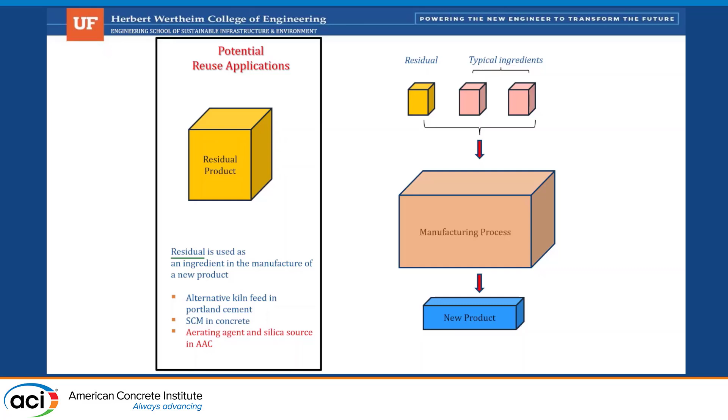So real briefly, we've talked a lot about this, but when we think of residuals for use as a reuse application, we can have recycling products and we can also have reused products. And when we think about the potential for MSWI, it can be used as an aggregate, it can be used as a number of different components for concrete, and in this case, a little bit more of a specialized ingredient, and so I'm going to talk about that today.

For those who are not familiar, the waste to energy process is just basically burning garbage, okay? And so we have our urban or suburban household trash that gets put into a waste bunker that then winds up going into a boiler, into a furnace. Furnace powers the boiler, you get electricity out of that. And then all the stuff that we don't want are the residuals.

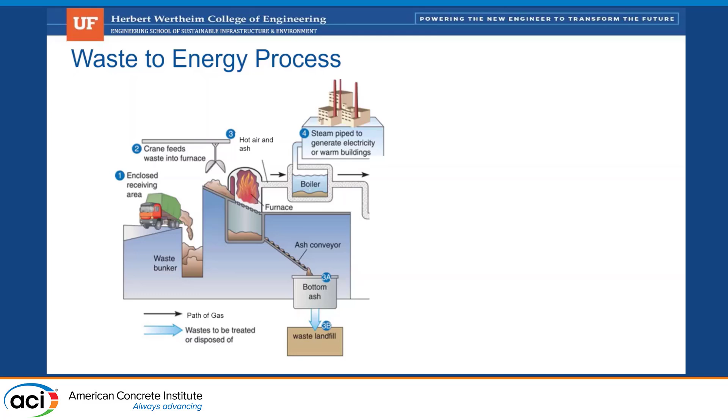The bottom ash is 80% of the total residual, so about 80% of all WTE residual is the bottom ash. There's also some waters that come with that. Those usually wind up right in the landfill. And then there's some fly ash as well. I'm not going to discuss most of that other than bottom ash today, okay?

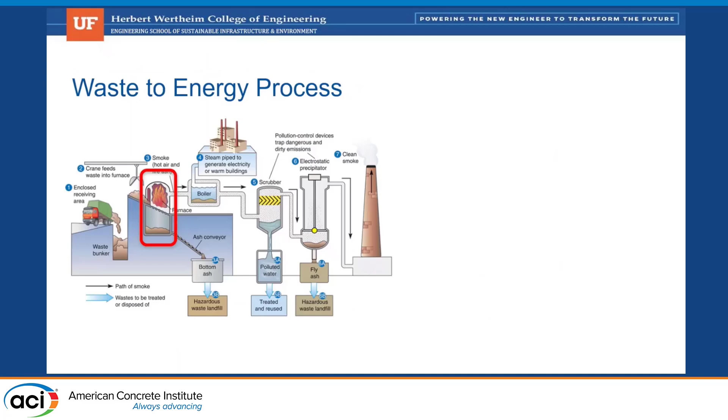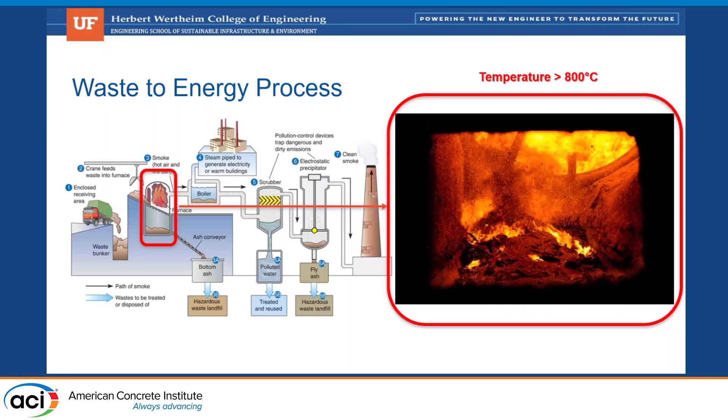And so focusing on the furnace for a minute, let's see what we really have when we look at that, right? So in there, we basically have a controlled, but uncontrolled at some levels, roughly 800 C burn. It's not as controlled as a cement kiln, and it's not as hot as a cement kiln either, so we're not getting complete combustion of all the materials in there. So when we're finished burning that, we get a residual that looks like basically very dirty coarse aggregate, or even aggregate for concrete.

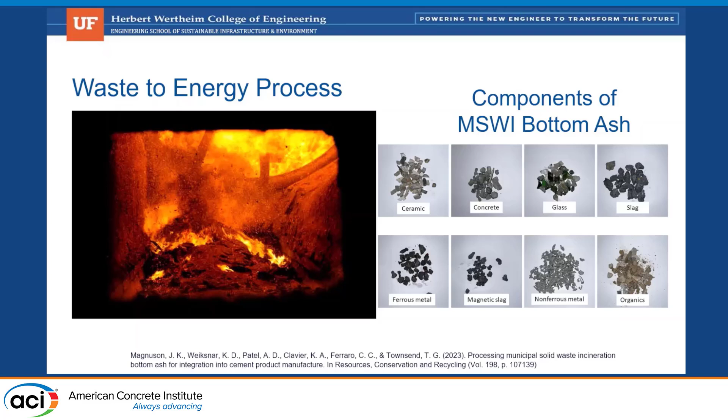And if we clean that stuff up and we look at our components, we have ceramics, we have concrete, we have glass, slags, ferrous metal, and non-ferrous metal. And for the purposes of this talk, I'm going to focus mostly on the non-ferrous metal, the aluminum.

Okay, and so if we look at the elemental composition of waste to energy ash, municipal solid waste incineration ash, we have some similarities and we have some differences. The aluminum content is the most important part with the bottom ash that we're looking at. We see that we have an elevated aluminum content in our residual. We also have a metallic aluminum content in our residual.

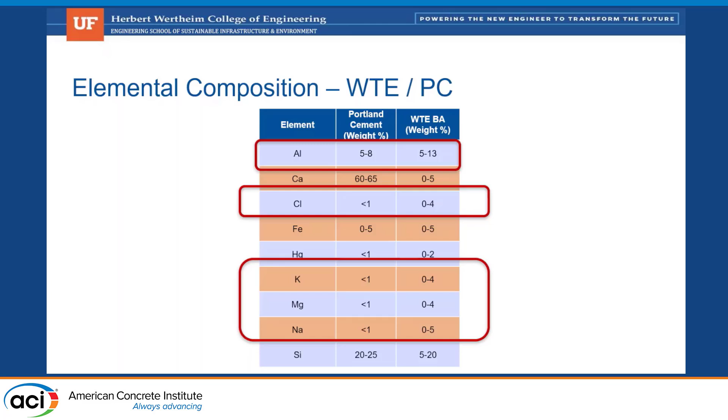That's very important. Chlorides are there, which is obviously a problem when we think of potential issues with rebar corrosion and so on. And then we have elevated alkalis. I'm not going to discuss the alkali portion today, but I didn't want to be silent on it either.

Okay, so the percentage of aluminum in MSWI bottom ash is about 3 to 15%, depending upon the source, depending on how good the non-ferrous metals removal is. Non-ferrous metals removal is becoming more popular, so I expect this number to decrease over time. There's a large initiative throughout the US and especially in Europe to mine MSWI landfills and really just reclaim those elements. Basically, I consider it to be like an urban mine, a mine that is born from our waste materials.

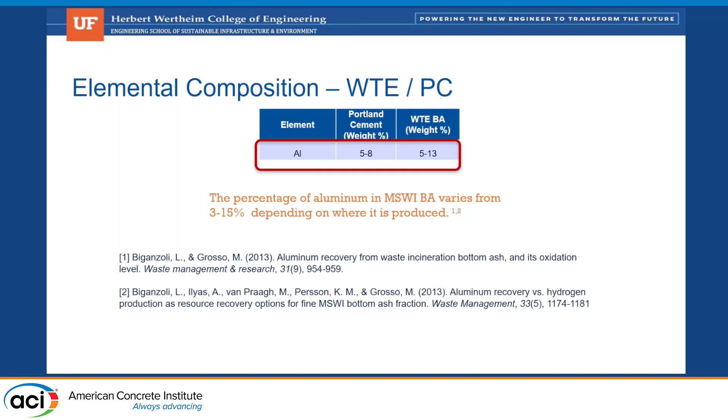Okay, so what I want to do for a moment, and this is a little bit more of the material science portion of what I'm talking about today, is spend a little bit of time talking about the corrosion of aluminum, but not so much to put you to sleep, so we're going to skip some equations. But we have aluminum, we have an aqueous environment, and that will result in some hydrogen gas.

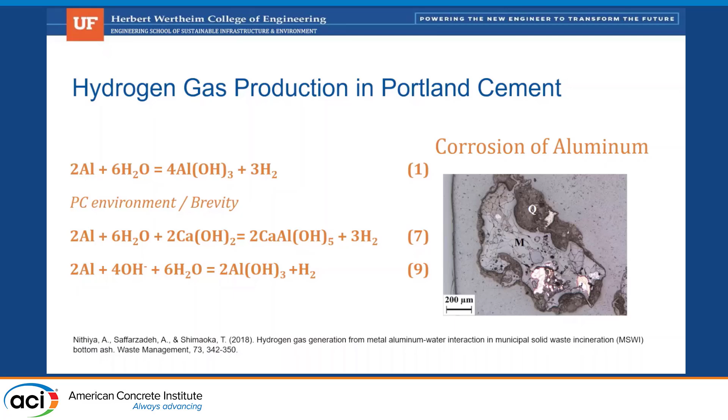When we get into our Portland cement environment, we obviously have elevated pH, we have calcium, and so on. And so skipping a number of equations, we see that we have, again, our metallic aluminum, our aqueous environment, and that turns into a corrosion product and the evolution of hydrogen gas. This is obviously the important part for what we're doing as we use it towards autoclaved aerated concrete. And this is just basically our final equation in that, we'll call it a brief derivation of hydrogen production from aluminum in MSWI.

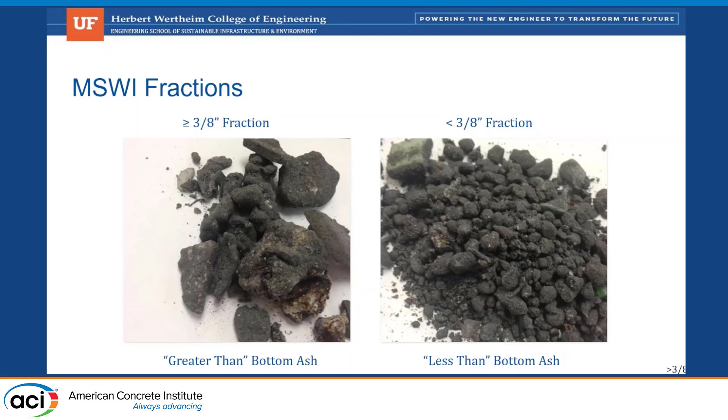So when we first started looking at MSWI, we started segregating it into a coarse fraction, which we call the greater than fraction, and a finer fraction. And so we used a 3/8 sieve and basically said, okay, everything bigger than that we'll keep, we'll use for concrete as a coarse aggregate. Everything less than that we really don't know what to do with. So our first step was, what do we actually do with this stuff? And part of the reason for that is I just talked about the hydrogen gas formation.

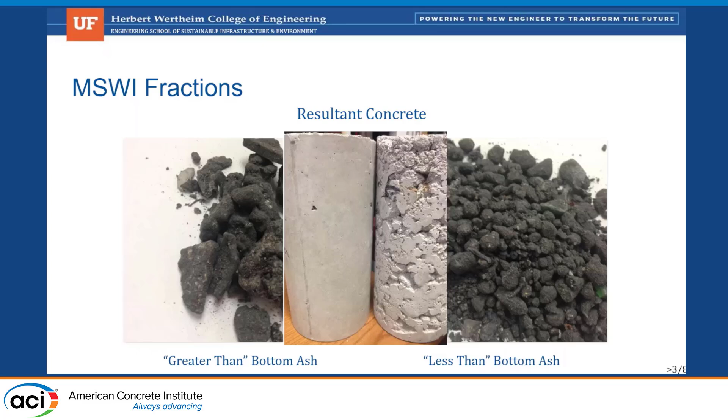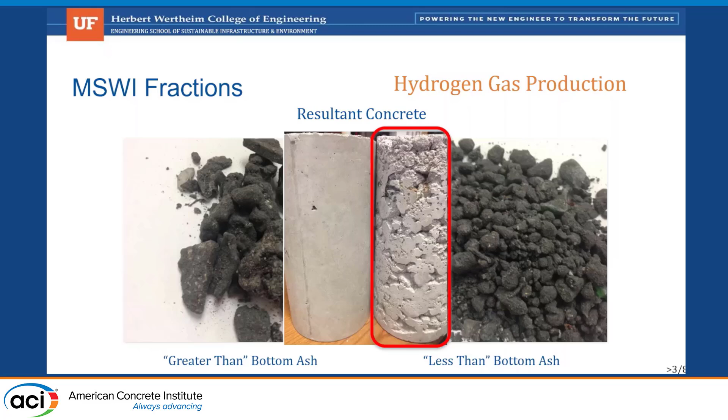If you look at the resultant concrete of the stuff on the left, that looks like normal concrete. That's using the greater than MSWI. When we use the less than, we saw a lot of hydrogen gas formation. And so you see bubbles, you see poor workability. It's just harder to use. So we're not going to use a fine MSWI in concrete production based on everything that I've experienced so far.

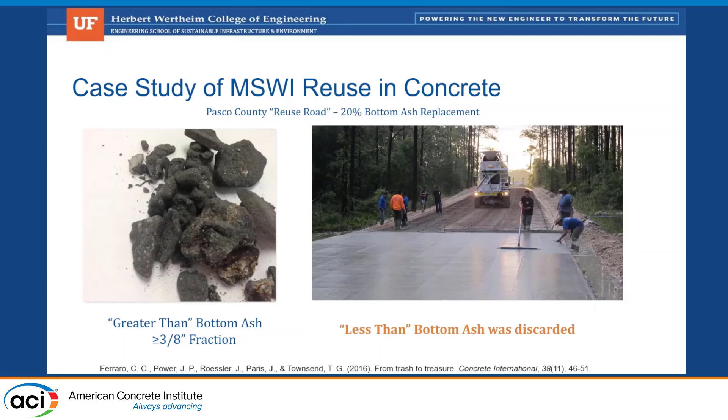We did do a case study where we built a road down in Pasco County out of that stuff. But again, we had to get rid of the less than stuff. So we have basically half of our MSWI ash not being reused. And that is, I think, one of the problems that brought us into maybe we can reuse it in another way. So how do we upcycle this stuff?

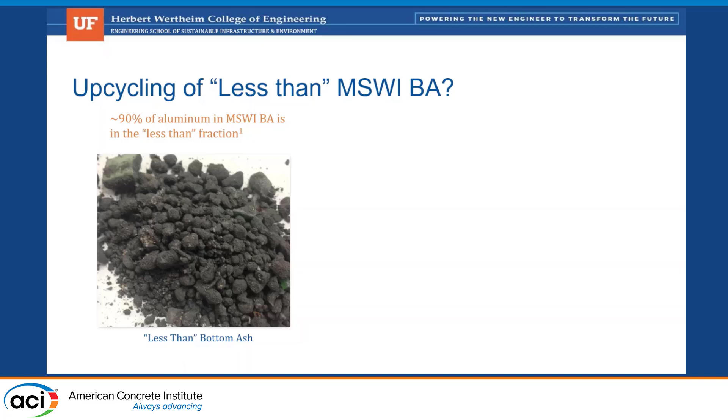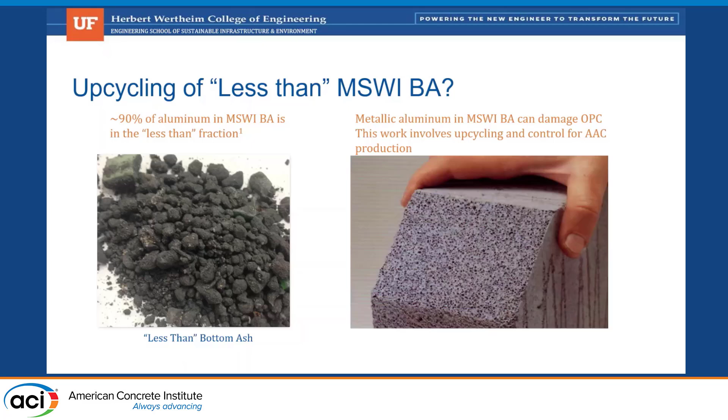We know that 90% of the aluminum is in the less than fraction from research, and I'll show some data that also confirms that. And we know that while metallic aluminum in MSWI can damage OPC structures, if we can control that, it actually can make an aerated structure. And so that's what this research focuses on.

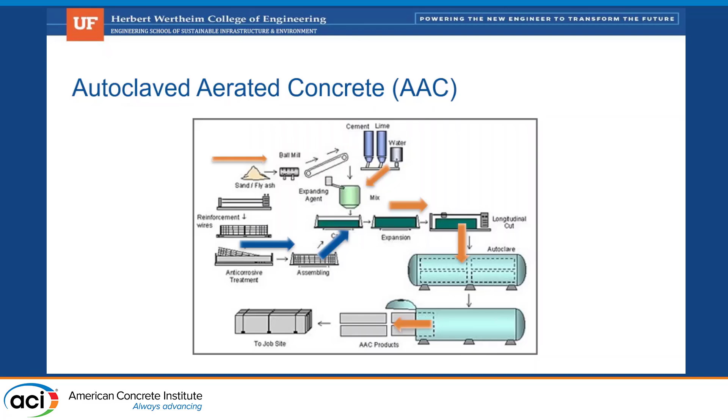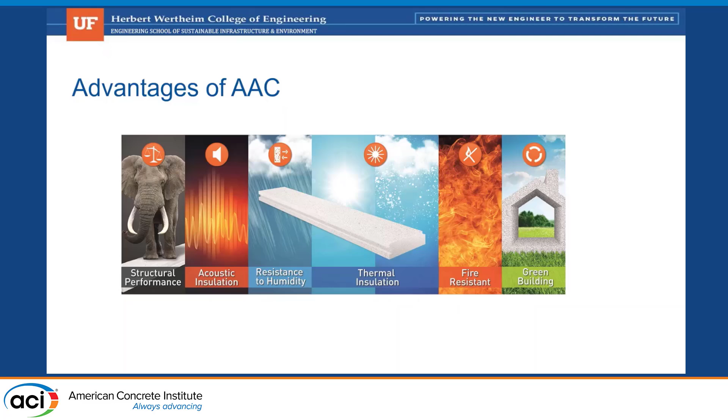Advantage of this stuff, basically, it's a good construction material that's relatively light, has a decent compressive strength to it, about 5 MPa, so 500 PSI, somewhere in there. It's used for building homes. It can be used for a number of other things. It also has a decent aesthetic look to it.

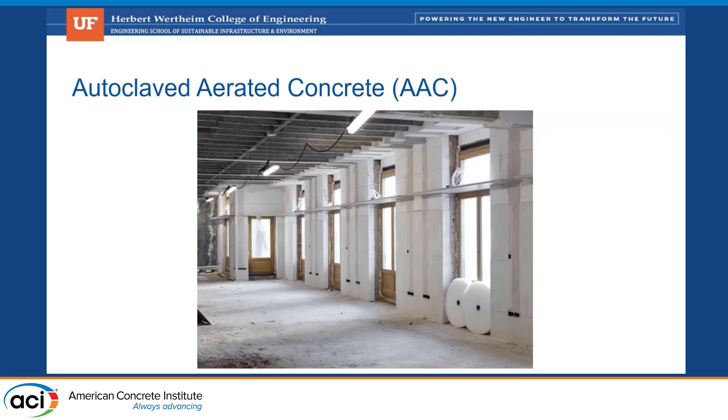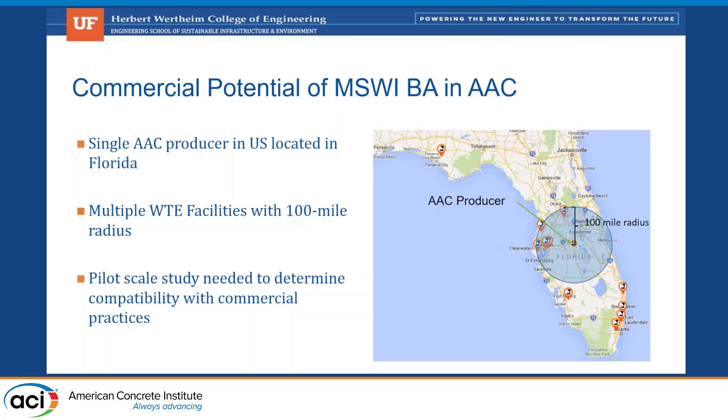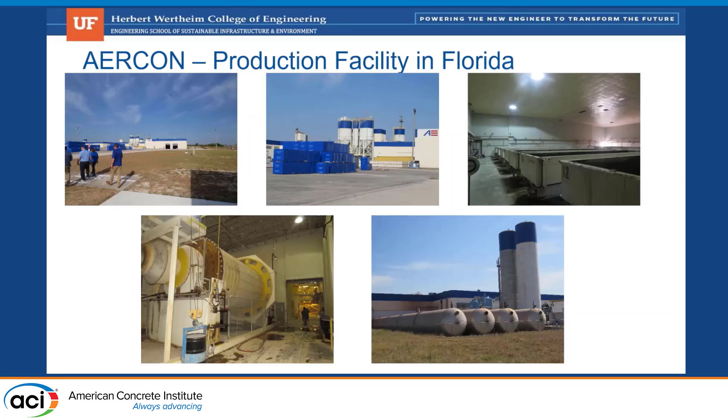In our particular state, Florida, in the US, we have a 100-mile radius from one AAC producer. But one thing unique about Florida is we have 15 waste-to-energy plants. So we do a lot of waste-to-energy in Florida, more than most other states in the US. And so that gives us a little bit of an opportunity to use this stuff. And that AERCON site is the one just south of Orlando in Florida, and that's their production facility. They were gracious enough to let us visit and gave us a lot of pointers on how to make good AAC.

All right, so now we want to start combining those two. We've given you a background on AAC, we have a background on MSWI. Let's go ahead and combine those two and see what we get. So again, we know that MSWI contains aluminum. We know that it also has silica, and we also know that it has things that we want from our Portland cement: silica, calcium, and so on.

It can be domestically produced. From prior research, we know that we can actually improve our air-void distribution, improve strength potentially, and reduce material costs. And the economics behind this is a long conversation we can have maybe after all the sessions end and have a beer over that, because I think one of the biggest barriers with anything is not just is it cheaper, but is the material consistency useful in a production scale?

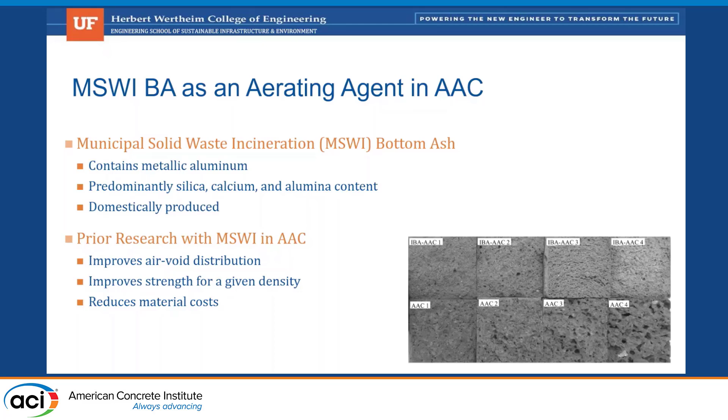And I see this with MSWI and cement kiln feed. I see it with this product. I see it as an aggregate. So every time we go to use this stuff, there's someone on the specification side saying, can you give me something as consistent as what we get with naturally mined stuff? And the answer is usually no, and that's the biggest barrier I've seen so far.

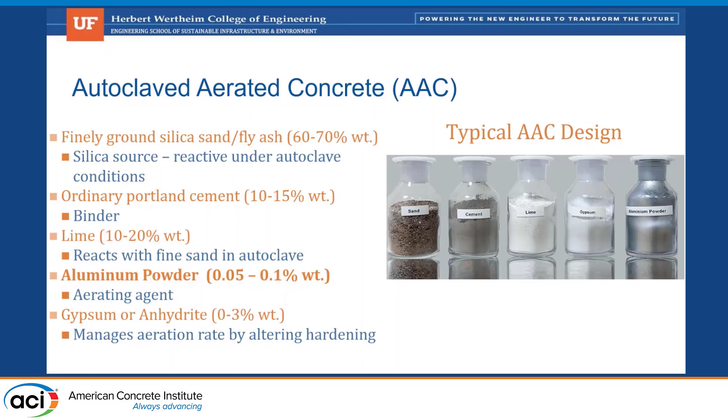Okay, so what do we look at when we see our typical mix design for AAC? We have basically sand that's ground up, some Portland cement, some lime, aluminum powder. And the aluminum powder is very reactive. When we went and visited that site, they have it in a bunker because it's basically explosive. It's so reactive, so they can't store it like you would normally store aluminum. So that in and of itself made me feel like, all right, maybe if we take some less reactive MSWI, it's easier to store and much safer to use. And then we'll also add some gypsum and anhydrite.

Our particular design is we obviously were replacing the aluminum with MSWI. So we had to increase the weight of that because the pure aluminum obviously has a lot more aluminum, where MSWI has a fraction of aluminum. So we were also able to replace some of the sand as well because that's present in the MSWI.

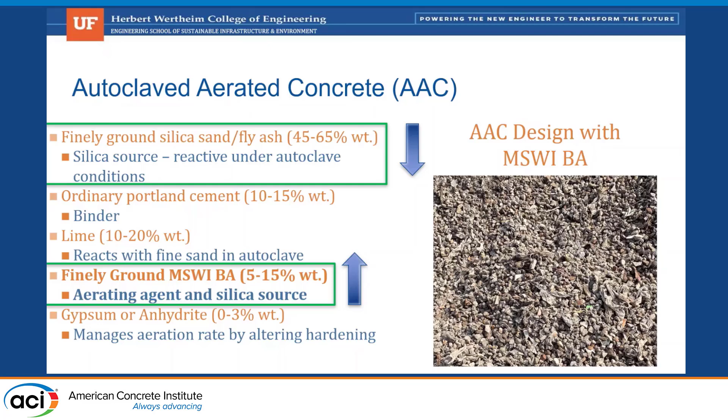So I'm going to give a very brief overview of the project we did and touch on some of the highlights. So our task 1 was chemical properties, task 2 is size reduction and hydrogen gas production rate, and then dry density and compressive strength. And I think I have one slide on the third task.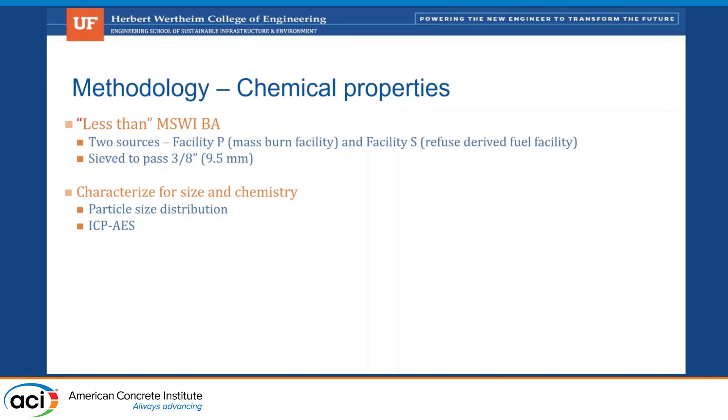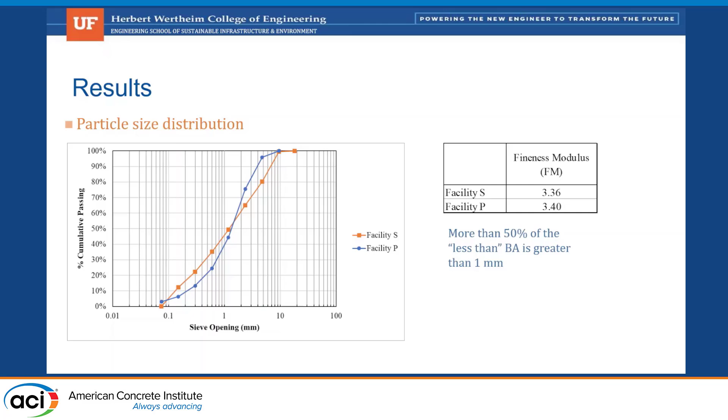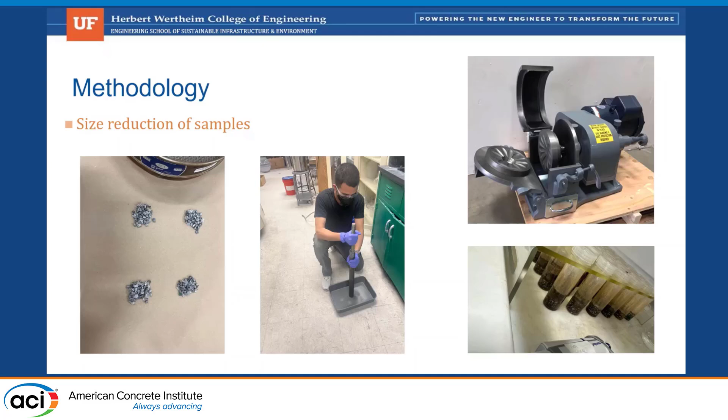And so we did some particle size distribution, we did some ICP. Particle size distribution was a little bit on the crude side. We did some sieves, and then we went ahead and pulverized that. When we look at our average size, we're looking at a D50 of around a millimeter. And more than 50% of that bottom ash is greater than that. And so poor Robbie there in the middle, one of my undergraduate students, is basically doing what we'll call a hand hammer mill, and then we put that in the pulverizer once it was small enough. If you do decide to work with this stuff and you have those mills, make sure you use the ceramic plates, because it'll tear your metal plates to shreds in one pass.

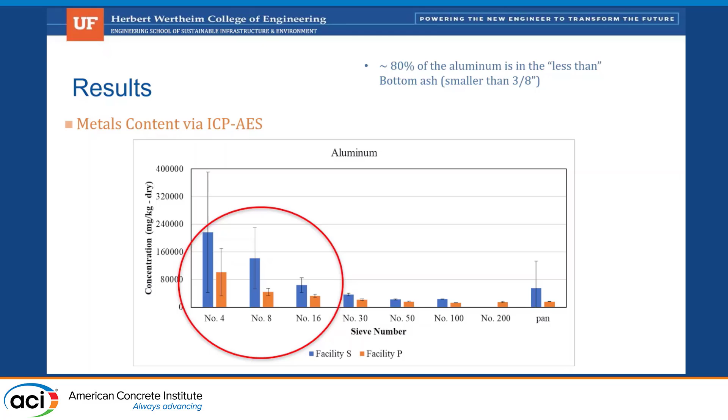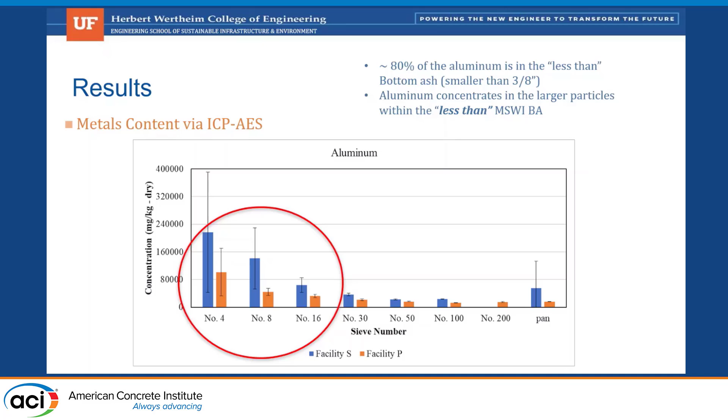One of the things that we found out that was pretty important, we feel, is that when you look at the less than size, the majority of the aluminum is in the greater fraction of the less than material. So I split my 3/8, and I have most of the aluminum migrating in the number 4, 8, and 16 sieve. So if we were going to do more work and really try and focus on the aluminum, that's where it resides. And again, that's a product of the non-ferrous removals at the particular waste to energy facility. That's going to change with more advanced non-ferrous metals removal in the future. Okay. And so we got our size reduction. We wanted to get into hydrogen gas production.

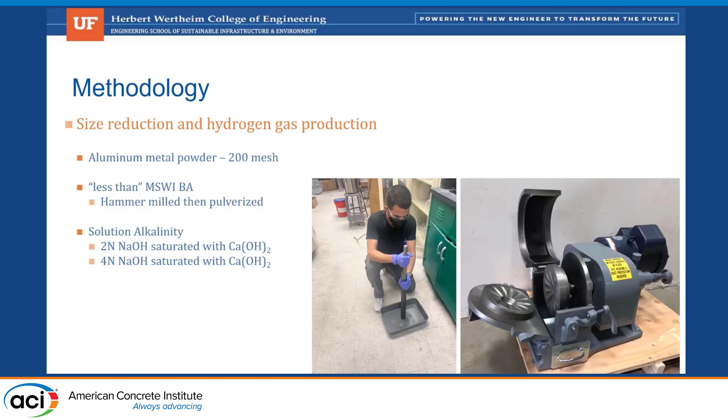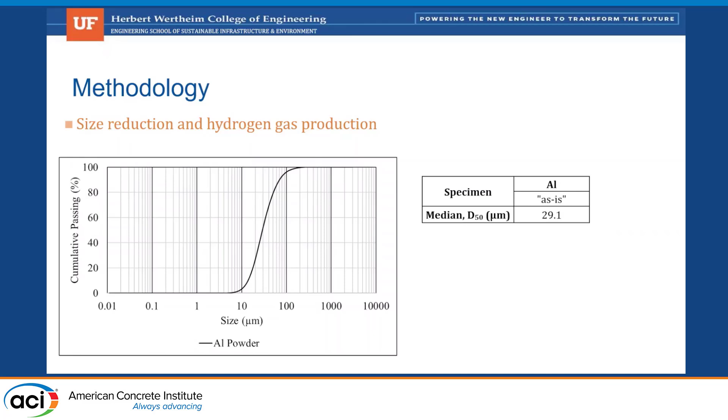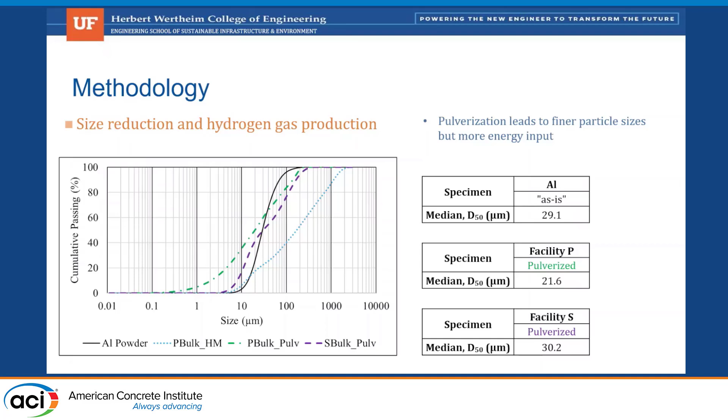And so we took our aluminum metal powder and basically worked on a comparative test where we did aluminum powder versus our MSWI. We did some solution alkalinity, and I can't get into the hydrogen test. I really would like to go into depth on that today, but we developed a test to measure our hydrogen gas. Again, we have our smaller aluminum particles, and there's one that's unpulverized, but we're looking at the finer fractions, so the stuff more towards the left side of our screen as far as the aluminum and its reactivity.

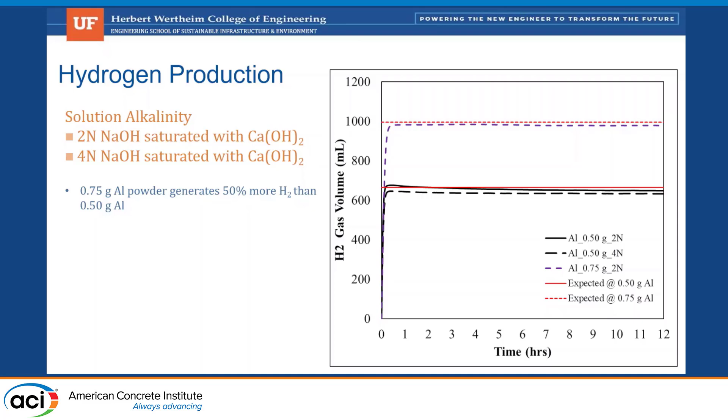And so when we look at that, we have basically what is an expected line of hydrogen gas production if we use a perfect equation. And then we have the stuff we're getting in the lab. What we basically found out is we can measure the hydrogen gas production produced from an aluminum source. Again, that's an experiment that collects the hydrogen gas formed in a liquid container that we've developed. So the red lines give us our expected, and we're about 5% error. I'm pretty happy with those numbers.

Another part of this is the gas generation has to be fast and exhausted within minutes of the reaction. And that's really important because the particle size of our aluminum has to be small enough that we get reactivity and hydrogen gas formation while the concrete's still plastic. Otherwise, we don't have anything useful. So that's obviously going to be a driving factor of workability and so on.

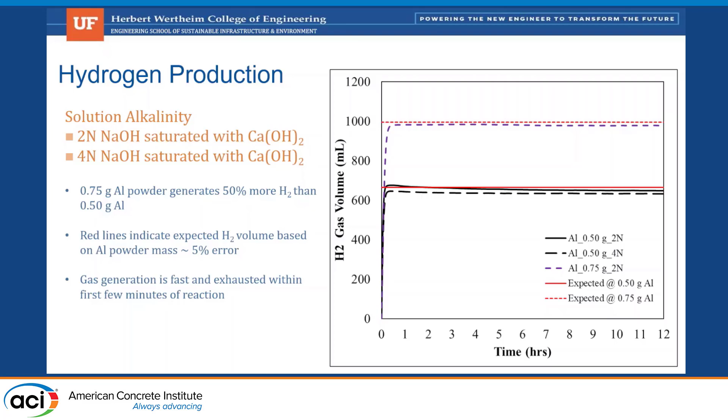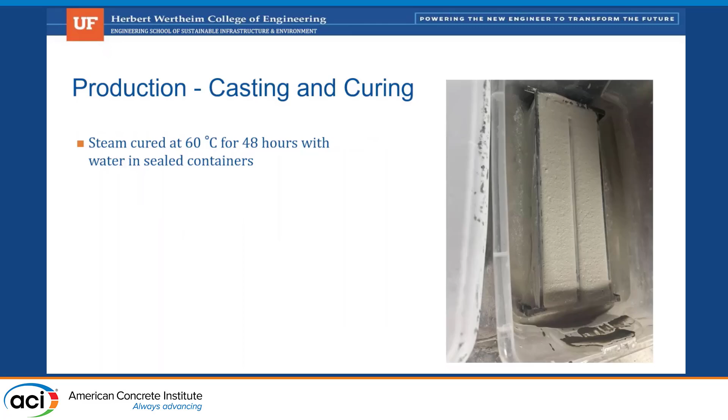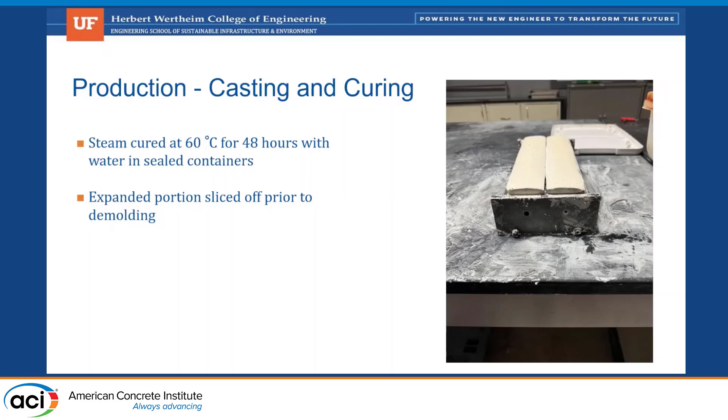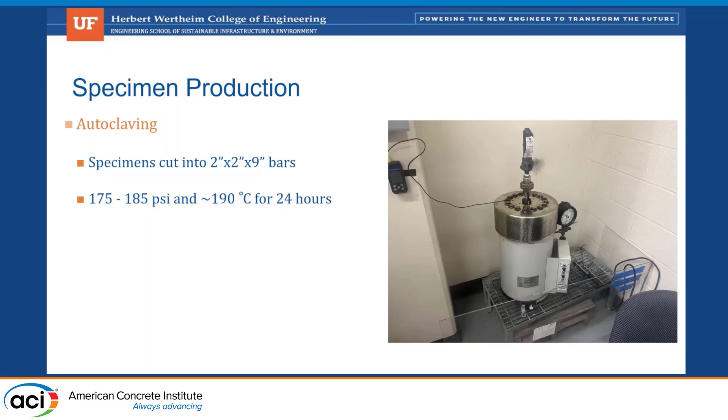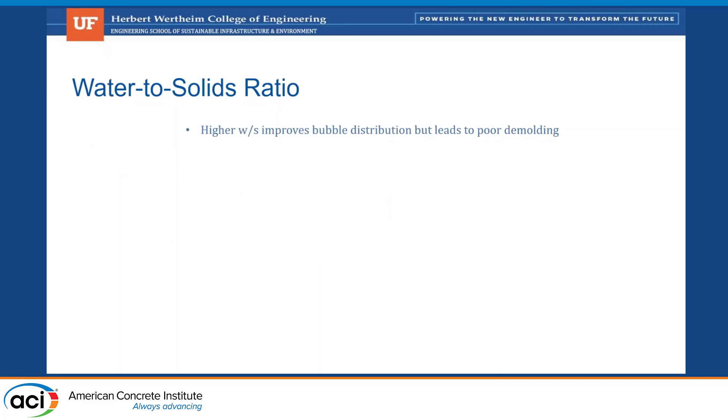So we put the 2 inch by 2 inch by 9 inch bars into the autoclave, let it go at 190 for 24 hours, and then we can scroll saw these and cut them into whatever sizes we want. What we did learn is the higher water to solids improves bubble dispersion, which is kind of obvious. The more workability you have, the better air dispersion, or in this case, hydrogen dispersion.

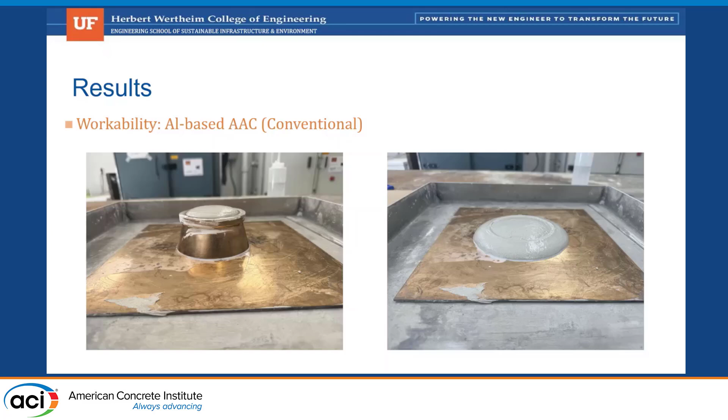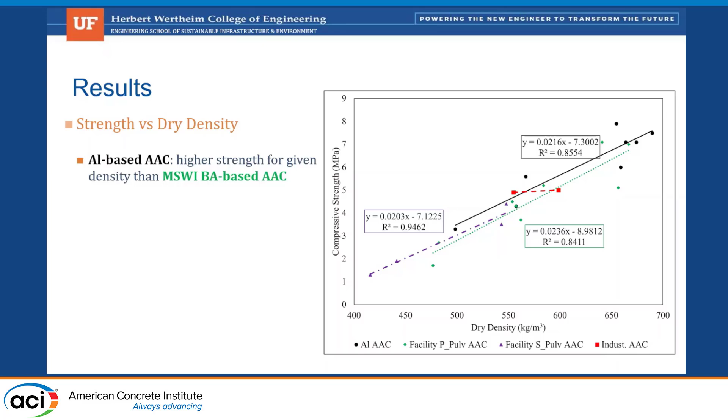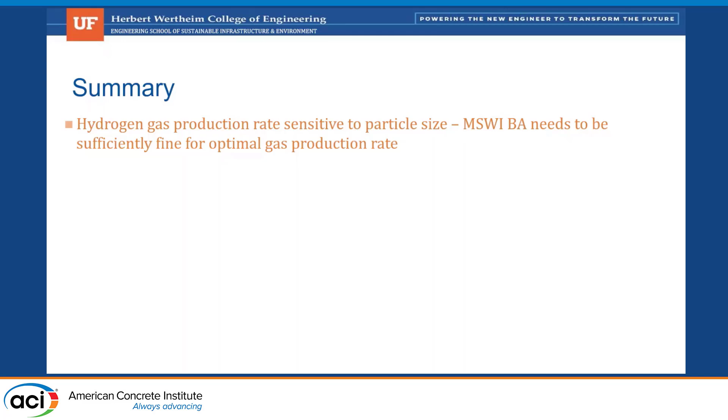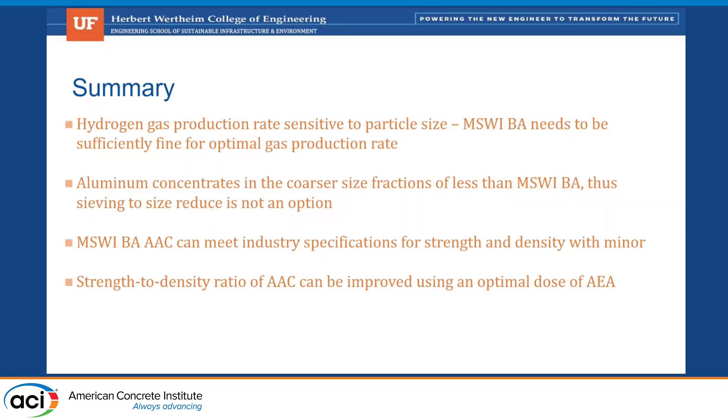And with the summary, the hydrogen gas rate is obviously sensitive to particle size. That's a very important part controlling all this. Aluminum concentrates in the 4 coarser size fractions. We can meet industry specs for air dry density, and the strength ratio is there.